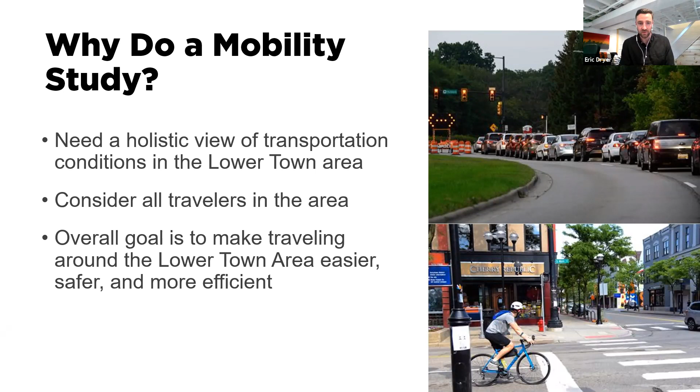So what we're looking at specifically are opportunities to make traveling easier within Lower Town. There's a couple of major traffic generators that we found: the U of M hospital, downtown Ann Arbor, the A2 STEAM School, and U of M North Campus, which are either within or very close to the study area. People are kind of going through this neighborhood or coming from this neighborhood to these traffic generators, contributing to the movements through the neighborhood.

Specifically, we're going to be looking at vehicle traffic congestion, how folks are able to bike and walk around the neighborhood, what those connections look like, what the safety portions of that look like, and how you're able to get around using public transit—where there are deficiencies in service, amenities, stops, or just general routing.

Safety issues that may be a result of outdated engineering standards or roadways that just haven't been updated in a long time, and intersection designs which can help improve cars moving through, and vehicles or bikes and pedestrians for that matter.

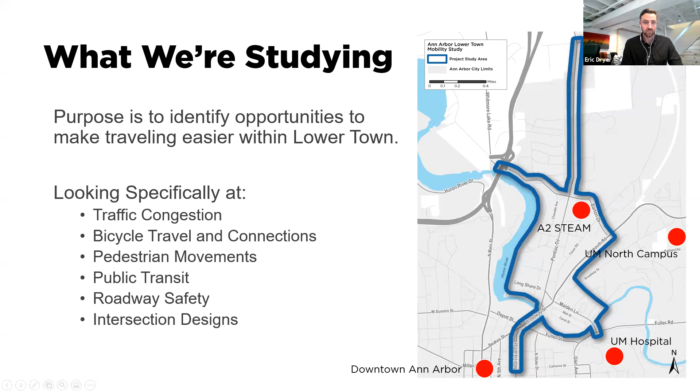The study process, we're maybe 18 months into this two-year process, about 75% complete. We've gone through the conditions analysis, project vision and goals, and we're now at the part of solution development. We're looking at what those potential solutions might be to some of the issues in the neighborhood and in the Lower Town area, and we're going to start to refine and evaluate those down to what the priority improvements might be. The next and final step is the final recommendations, which will be part of the final report and document.

The overall outcomes of the study, we're looking to identify ways to improve mobility for all users. We've hit on this a little bit already, but drivers, cyclists, pedestrians, transit riders, new mobility, bike share, scooter share, whatever it may be. Everything is considered in this study.

At a higher level, we're looking at how these opportunities can help change travel habits. Right now, people are used to just getting in their car and driving to where they need to go because that's the only way to do it. That's what they're used to. How can we, through some infrastructure design and other ideas, help change the way people get around Lower Town and around Ann Arbor? Maybe it starts out at one or two times a week, or one or two trips a week, but every trip that we take that's not in a vehicle helps reduce demand on the system.

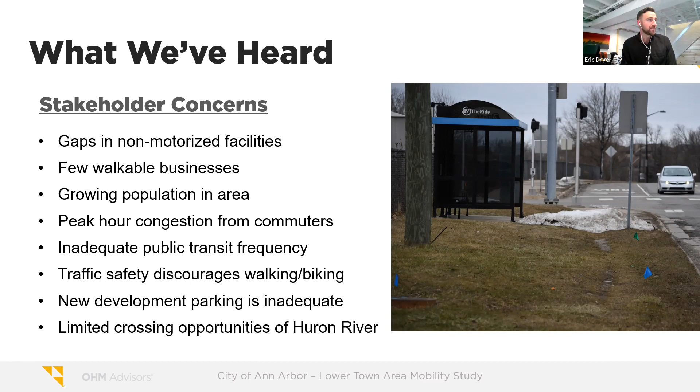We had a series of office hours a few months ago, one every week for a month I believe, and each one was on a different topic. We had some specific discussions about non-motorized traffic, about vehicle traffic, and other topics, and some specific areas in the study area were identified that needed safety improvements.

A lot of residents don't feel comfortable walking and biking in the area. They want to, but they just don't feel safe doing it. We mentioned transit - transit typically isn't fast enough or frequent enough for people to use on a daily basis. And there's a lot of heavy traffic that comes in off of M14.

The bike infrastructure is disconnected. A lot of the pedestrian infrastructure is disconnected as well, so people are riding or walking in the street.

There were some safety concerns around the A2 STEAM school that were causing some headaches, specifically at rush hour in the morning when kids are being dropped off. And we mentioned the new developments, and that's also adding to some of the traffic. There's fears that more development is going to add even more to the traffic.

There are some large safety conflicts between bikes and pedestrians on certain parts of the boardwalk on Barton Drive and around the study area. I believe with that, oh wait, no, there's one more slide for me.

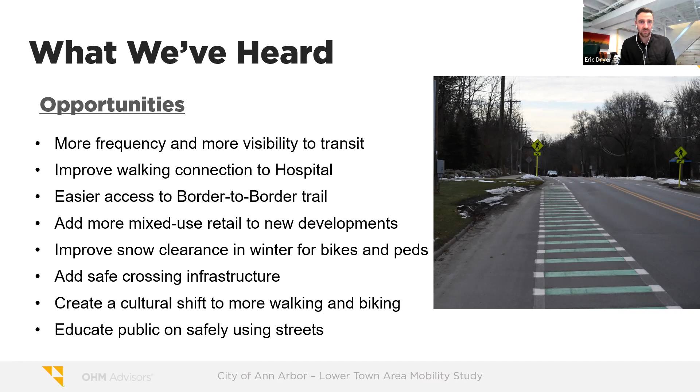I'm going to touch on all the different modes that we've been looking at. But before I get into those, I thought I could quickly touch on a few of the questions that were up there. There was one: is there documentation that new development parking is inadequate?

The last three slides that Eric just went through were what we got out of the stakeholder engagement. We had multiple meetings with stakeholders around the community, and those slides were just the findings that came out of that, along with the office hours. The office hours that Eric talked about were Zoom meetings where the public was invited to come in, and it was basically documenting what we heard from them.

We have not prepared any type of analysis that says development parking is inadequate. What I do remember hearing is that I think it was maybe the businesses in the area were lacking parking. Was that the gist of it, Eric?

I don't want to dwell on that, but I think it was a combination of the new large development and some of the businesses anecdotally not having enough parking, and people parking up on like Broadway and some of the other neighborhood streets, then walking down and just leaving their cars there for days at a time, essentially. Again, this is anecdotal — it's only what we heard from some neighborhood residents, but it was kind of related, I guess, to the new apartments.

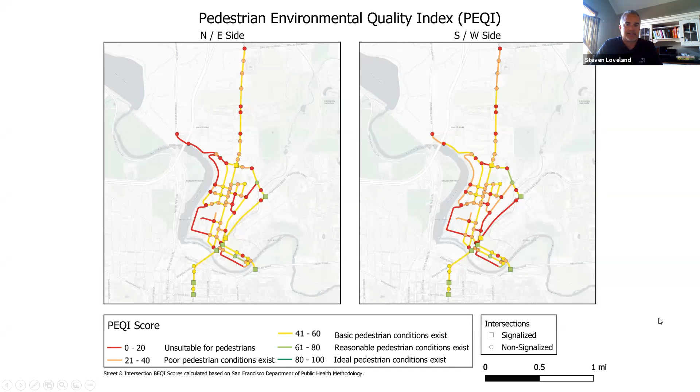As part of that inventory of the pedestrian infrastructure, we went over this in past presentations, so I don't want to dwell on it, but this is basically showing that we looked at all the intersections and all the segments. If it's yellow, it's saying basic pedestrian conditions exist. If it's red, it's saying it's unsuitable for pedestrians. An unsuitable area might have no sidewalk, or no crossings for all the legs of an intersection. Suitable would be there's sidewalks, crossings, or street lights. That's just some of the things it looked at.

So the major pedestrian findings out of all these different things we've done: there was a recommendation that came from the public about putting in rectangular rapid flashing beacons, near the school along Pontiac Trail. High emphasis crossings came out of the study of the unsignalized intersections, giving us a number of locations we could improve or enhance the crossings.

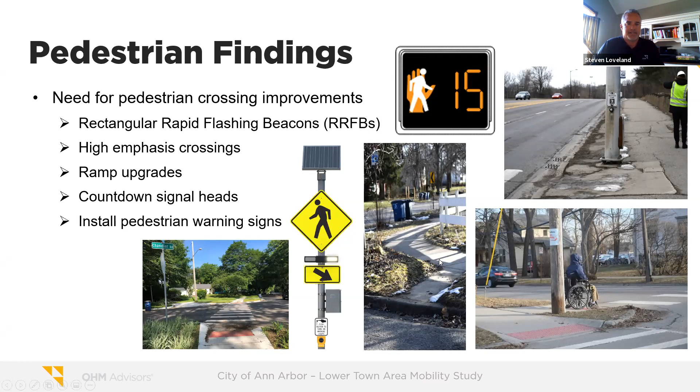There are some outdated pedestrian crossing signals that just have the hand or the walking person, but we're recommending upgrading all of those to countdown signal heads. And then there were a number of locations under consideration for additional pedestrian warning signs.

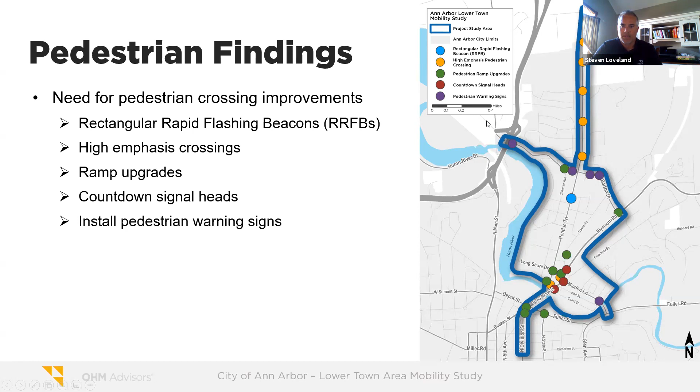Additional pedestrian findings, things that could improve the pedestrian experience: street trees and increased green belt—this came from the public engagement process, I believe the office hours. From the road safety audit, we identified gaps in the system for sidewalks, or where fence was broken or missing.

Lighting in general, the whole Lower Town, or the major routes throughout the area, are very well lit. There was only one stretch that didn't have lighting, and I'll show that in a minute. And then school improvements—we spent a day of the road safety audit just watching the school and trying to come up with recommendations on how to more safely get students to the school, separating vehicular traffic from where the pedestrians are coming.

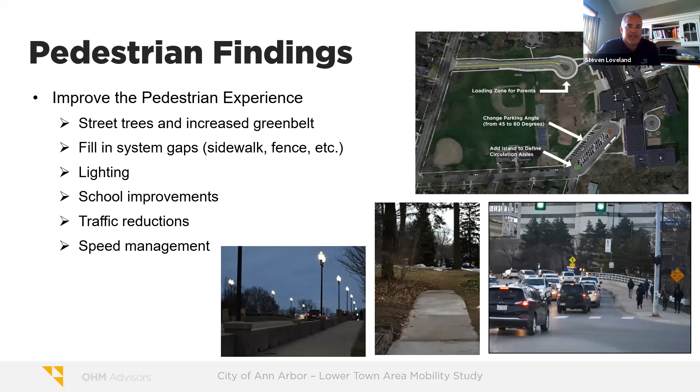And then ideas for reducing traffic and managing speeds—I'll get into those later in the presentation.

That intersection is lit up, but one thing we noticed during the road safety audit was that the lighting out there doesn't shine down on the pedestrian crossings. It's a little bit away from the crossings, and it could be improved for pedestrian safety if it was more focused on those crossings.

I'll take a break here, see what other questions we have.

There's a question in the chat from Cedria Clark about RRFBs.

Are they useful by the school when peak traffic and pedestrian hours are during daytime? So would they be used during the day and throughout the day, or only at the peak hour?

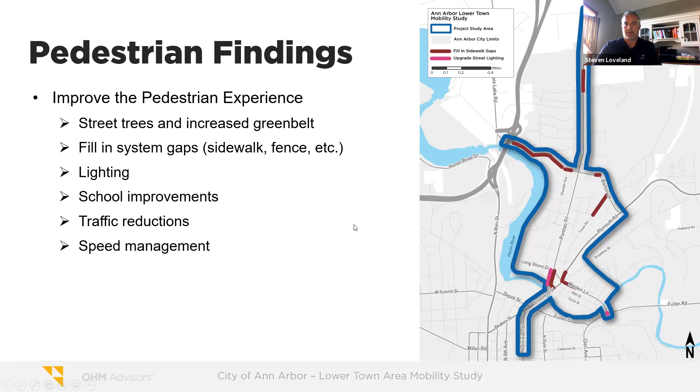That's in this area. Okay. Good questions, everybody.

Okay, the bicycle analysis approach. Again, we did the same type of thing we did with pedestrians - a bicycle environmental quality index. We also considered bicyclists during the road safety audit. And we heard a lot from the public and stakeholders about biking in Ann Arbor, biking in Lower Town, where biking is lacking.

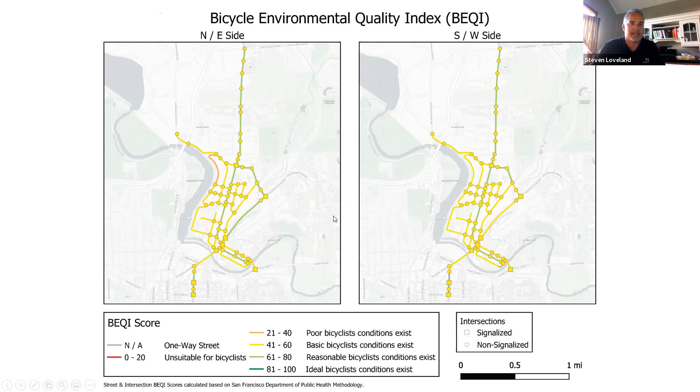So the key findings coming out of the bicycle analysis: what we heard a lot is wayfinding signage is just not out there to identify where the bike routes are, where they end, where they start. Another major issue brought up is where bike lanes end and there's nowhere for cyclists to go. One of the biggest spots for that is coming down Division heading north towards the Broadway Bridge, where the on-street bike lane just ends abruptly.

Another thing was on-street bike lanes. There's a number of areas around Lower Town where an addition of on-street bike lanes were recommended or brought up by the public as needed.

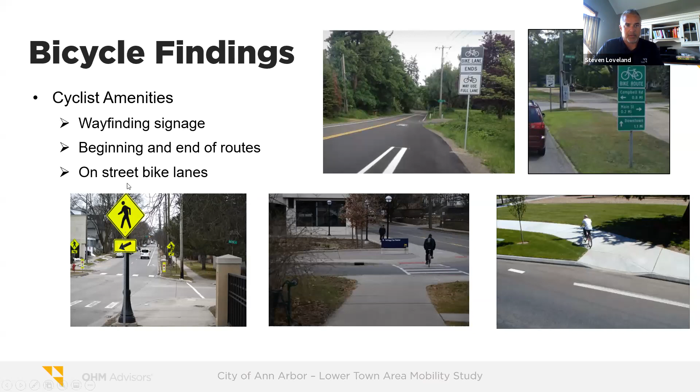There was a recommendation about a bike boulevard, talked about having that along Chandler. Lanes adjacent to parking - it was recommended to widen the bike lanes along parking areas, so that if vehicles are opening or closing doors, bicyclists would have a little extra room to safely travel those routes.

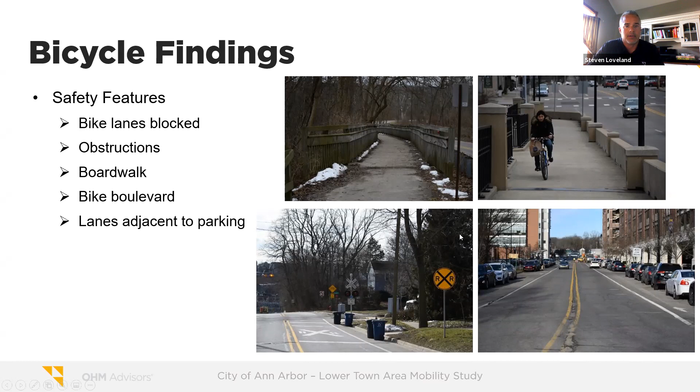So, questions on bikes specifically? I don't see any questions in the chat. Anybody want to raise their hand? We can always come back to this if you think of things at the next break.

Oh, there's a question. Is there the possibility of getting the Barton Street parking removed to complete the bike lane? Luke, do you know the part that's under construction now, Barton? Yes, there's still a little bit of work being done on Pontiac Trail north of Barton. I know there were sharrows added on Barton in that newly constructed section, but I'm not sure - parking is still there for now.

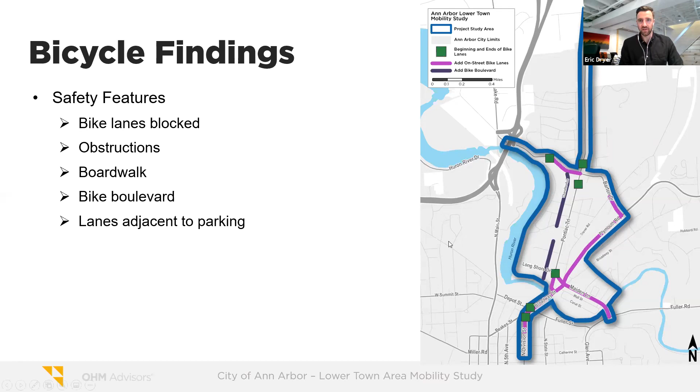Any last questions before we move forward? Again, if you think of things, put them in the chat and we'll get to them at the next break.

I'm going to move on to transit. For transit, we did some field reviews during the road safety audit, we heard from public and stakeholder engagement, and we also held a brainstorming session with both the public and key stakeholders to get ideas.

On this slide you can see, in the bottom right pictures, a pull-off along Pontiac Trail for one of the transit stops. In the top picture there's a bus stop, but there's also parking allowed right in front of it, so probably not the best setup for a bus stop to have parking right next to it.

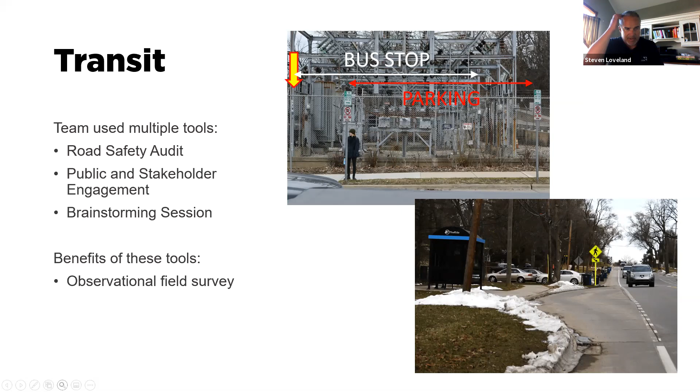So, transit findings on rider amenities: we heard there's a need for increased frequency and reliability of the buses. Our findings from the road safety audit were to upgrade the bus stops for ADA compliance. You can see in the two right pictures there's no pad for pedestrians to load. In the bottom right, this looks like it's used quite a bit, with a path leading up to where the bus loads. So we found a number of spots throughout lower town that needed improvement.

Additional park-and-ride opportunities: there is a park-and-ride lot at US-23 and Plymouth Road. We looked for other opportunities where additional park-and-ride lots could be implemented, and I'll show a slide on that further into this presentation.

Eliminate bus stop conflicts, as I mentioned on the previous slide. And then someone from the public engagement mentioned transit signal priority to help move transit through the lower town area.

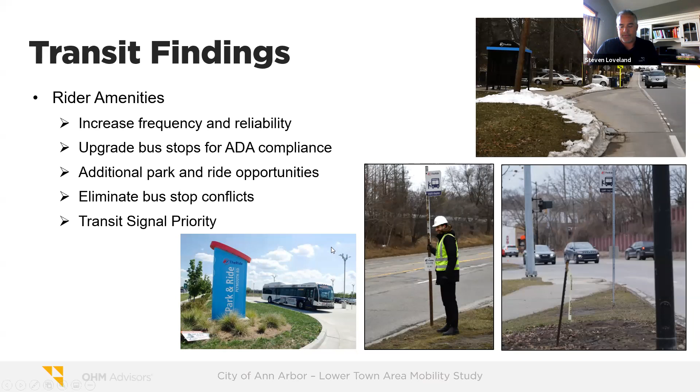This slide here basically just shows where we found bus stops that were missing landing pads or ways to the stop that were not ADA accessible.

And that was all we had for transit. If there's anything specific on transit, let us know.

I think there was a question about plans for more bus stop shelters. We haven't had any comments so far about more bus stop shelters. Luke, do you know if that's the bus agency that picks those, or does the city have a say in that? I haven't heard any specific needs or locations. Right, so far that has not been heard or proposed in this study. The city can, of course, make a recommendation, but I think it's up to AAATA to make the final decision.

And then, go ahead—oh sorry, there's a question clarifying, for each of these, what is based on data versus public engagement comments for each of the recommendations. Maybe we can explain a little bit what each of these actual recommendations are. They came out of both, correct?

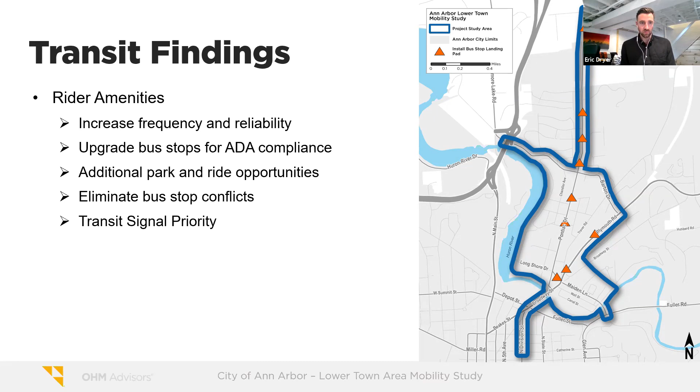Okay, I'm going to get on to motor vehicles. This is just a couple slides, and then it's going to get into more specific intersections and improvements. For motor vehicles, we looked at all the same stuff, but we also did traffic modeling of the existing conditions. For existing conditions, this was pre-pandemic traffic volumes - they're a little different now, but I think using the pre-pandemic volumes was conservative.

We also did a crash analysis of the entire Lower Town area. Key findings for motor vehicles - most of these came out of our road safety audit that we performed over a week's time.

Pavement markings - there were some areas where the markings were faded and needed upgrading and refreshing. Signing throughout Lower Town - we specifically pointed out some of these through the road safety audit, and the city is looking into them. Some of the signs, like the one in the picture upper left, have lost all reflectivity. So by improving signs and putting up fresh, new reflective signs, that will definitely help drivers at nighttime.

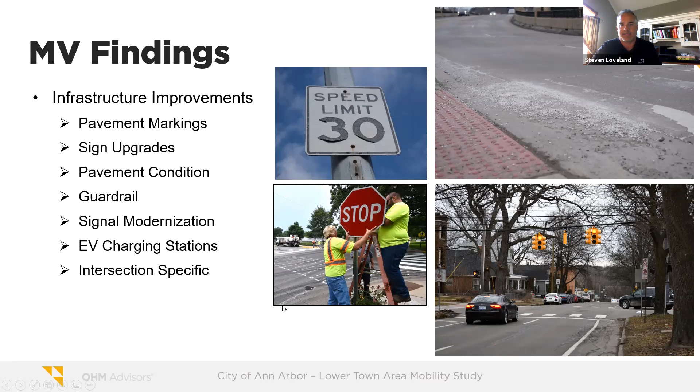Some driver technologies being recommended: changeable message signs coming into and through Lower Town, identifying maybe where there's traffic backups or if there's a train blocking - just what's going on in the area to help all modes of travel get through. Speed management concepts, which I'll touch on closer to the end of the presentation, and warning sign systems about traveling above speeds. Then transportation system management and transportation demand management, which I'll also touch on.

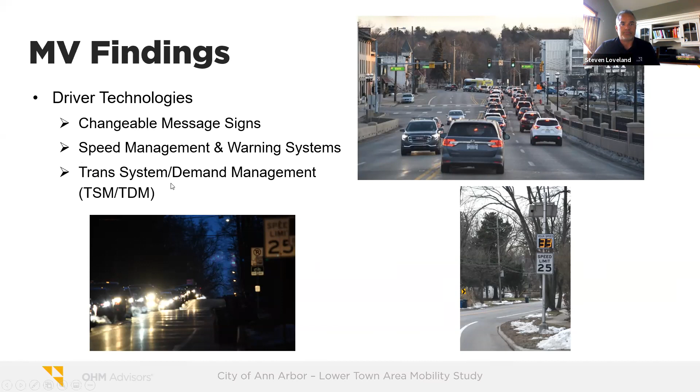I'm guessing there's not going to be a whole lot of questions right now, but once I get into more specific recommendations, I'll move on to those.

So there were high congestion intersections. We had 3 that were just based on observations from when we were out there. And then we also did our traffic modeling, and with the traffic modeling, we found some of the intersections had either failing or had failing movements at them.

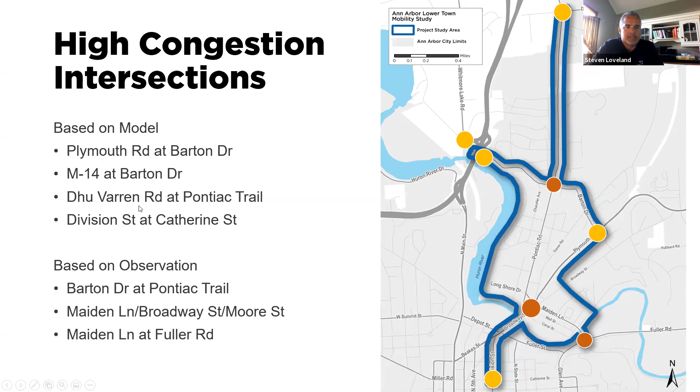The yellow dots are where we found failing within our traffic models. The observation locations were Barton at Pontiac Trail, Maiden Lane, Broadway, Moore, Maiden Lane at Fuller. But then in the modeling, Dhu Varren at Pontiac Trail, the M-14 intersections, Plymouth at Barton, and then there was Division at Catherine Street.

So Barton at Plymouth, what we found here is that in the AM peak hour or peak hours, there's a big delay on Barton trying to get out onto Plymouth. And it was showing over 70 seconds of delay.

So what we looked at here is potentially changing the lane configuration. Instead of just being a left and a right out onto Plymouth, it could be a dual left with a shared right. And in doing that, we reduced the delay by over 20 seconds. This isn't a huge change—you won't have to build additional lanes. It's more of a pavement marking, signs, and looking at the signal timing at that location.

We looked at a number of things at the Barton at Pontiac Trail intersection. What we've heard and what we've seen, there are operational deficiencies, there's on-street parking at the intersection, and we've had numerous people ask for the parking to be removed. In the AM peak, there are big delays on the approach to the intersection for eastbound traffic. In the lower right corner, you can see what a morning peak hour looks like as you approach that intersection. On average, it was 35 seconds of delay, which it can be much more than that.

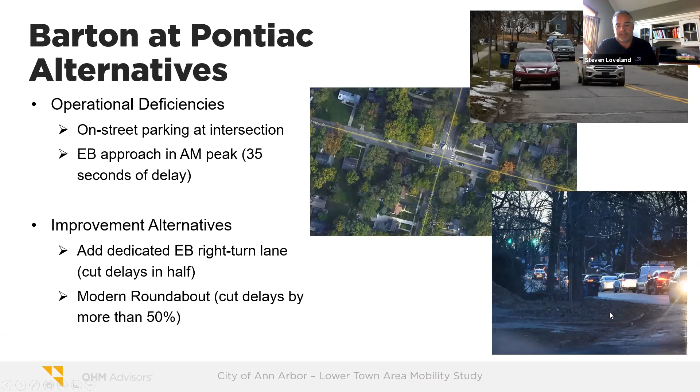Currently out there today, there is this temporary bump out condition. It eliminates the parking near the intersection, and it channelizes eastbound down to a single lane. So we're looking at restricting this eastbound parking, and we're also looking at the option of maybe making this temporary bump out something we could make permanent.

All right, do we want to see what questions have popped up on this so far? Yeah, there's a couple. Oops, sorry, that was my fault. All right, so the comments—well, go back to the Plymouth at Barton, I think people are talking about that first. Oh, there's a question before about changeable message signs and other technology and how that would change traffic levels.

Changeable message signs, that was also brought up—that was an idea that came through our public engagement process. Steve Deering, did you know more about that? I think you've talked about that quite a bit.

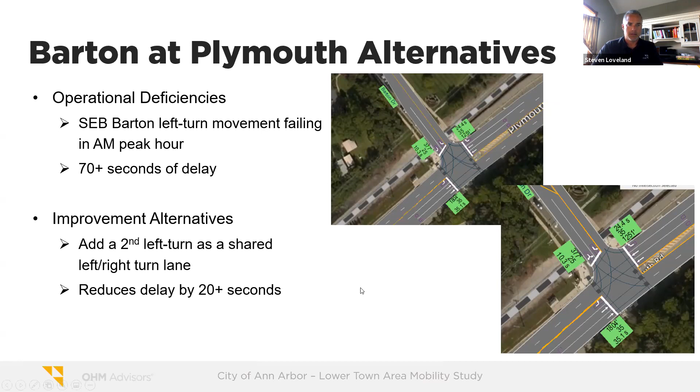Pontiac, Barton. Okay, so we've gone through this. I know people are talking about getting rid of the parking altogether and having a protected bike lane.

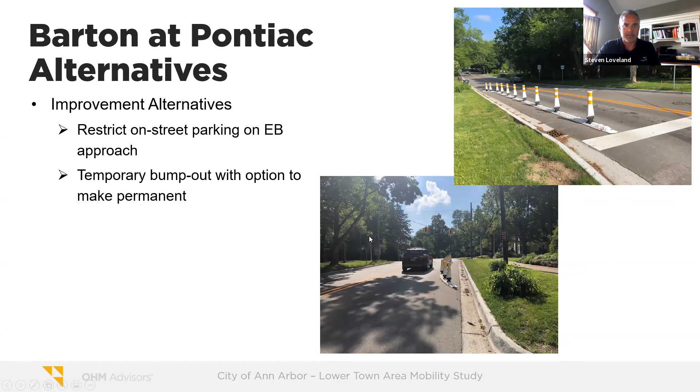That's noted. I'm going to move on to the next intersection, and we can talk more after we get through this if there's more discussion on these other intersections.

All right, Steve, I'm going to let you handle this. You're on mute, though. Hi, this is Eric Dryer, and I'm going to take over just so Mr. Loveland has a little bit of a break.

So this is probably the most complex and confusing intersection in the study area. Broadway, Division, Beakes, but it's also Carey and Summit and High Street and Detroit. So you have 7 streets that create this very complex junction.

And it's come to our attention through a variety of reasons. The crash study showed it was the highest crash location in the study area, 73 crashes over a 5-year period, 10 of those involved injuries.

It was also something that we noted very prominently when we did our road safety audit. It was also something that came up repeatedly during the stakeholder and other types of public engagement that we conducted. So, and city staff, they made a particular point of bringing this to our attention. So there's a lot happening here.

And one of the ways that we have to try to analyze something as complex as this is we look at conflict points. That's where a vehicle will cross or intersect with another vehicle path, that's where a vehicle will intersect or cross a pedestrian path, and that's how bicycle facilities, if they're on street, how that all interacts. And so there's an abnormally large number of conflict points in this area.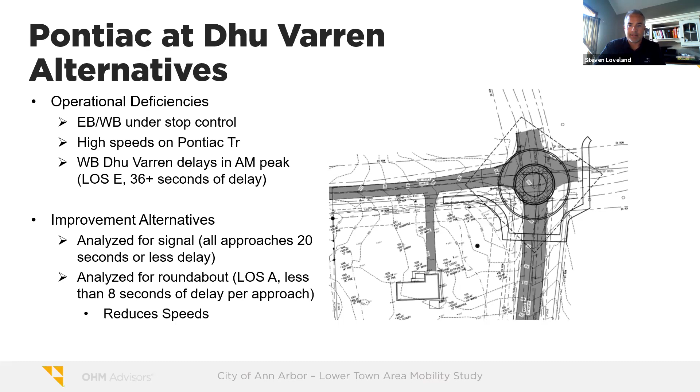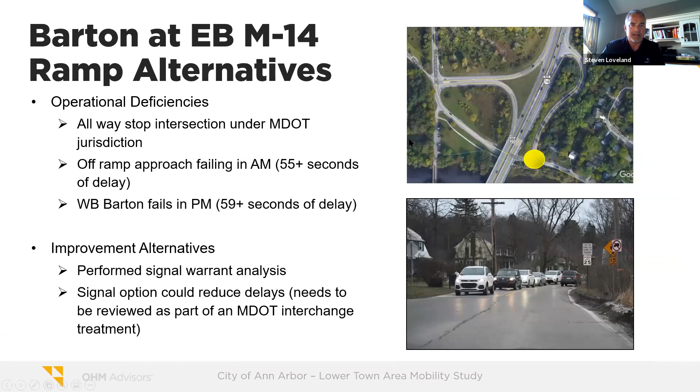Now we're at Moore, Pontiac, and Longshore, which is another very confusing junction of roads. This is another one that we picked up as having a relatively minor crash history, but it was certainly something that we noted with our road safety audit. Again, it was also pointed out to us by city staff, some of the stakeholders, and I think it came up also with the different office hour sessions that we held.

So to the north is Pontiac, and it's a two-way road, but at this junction, there's basically a split. Moore coming off of Broadway is a one-way in, and then Pontiac south of here, heading down towards Swift, is also a one-way. So this is where the two-way Pontiac becomes, with Moore, functioning like a one-way pair.

The geometry is confusing because traffic on Moore coming up that wants to go to northbound Pontiac does not have to stop. And traffic coming south on Pontiac does not have to stop, but all the other movements do.

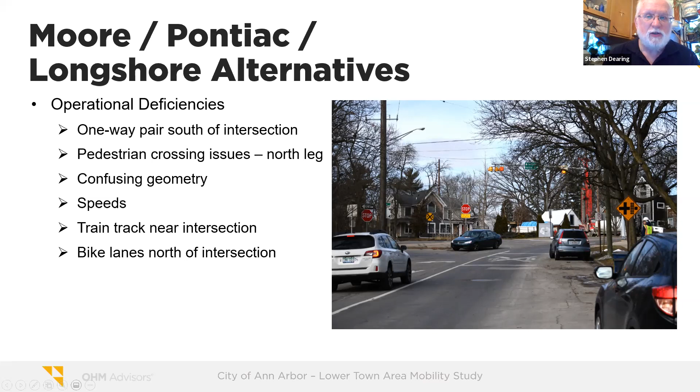But with this particular intersection, what we were focusing on most was the fact that there's a fair amount of confusion about this intersection. If you look at the picture, you'll see a vehicle that looks like it's trying to make a left turn from Pontiac onto Moore, except Moore is a one-way road. So just the nature of the geometry makes it confusing for everybody.

So again, we looked at alternatives, and again, the mantra of conflict points: if you can reduce conflict points, you're going to reduce the potential for crashes. And we had a whole range of alternatives.

In the top right, basically doing a better job with pavement markings and signs, to try to eliminate anybody making the southbound left turn to go wrong way down Moore, which is one-way. Making it a lot more clear that there is a pedestrian crossing on that north leg of Pontiac, so that drivers are more respectful in terms of taking that corner at a slower speed. So that doesn't do anything to reduce the number of conflict points, but it would still clean up the intersection and make it a little bit more obvious to drivers what's actually happening there.

Then if you go to the bottom right, yes, we know that there's an island there to help northbound Moore kind of make that sharp, almost a U-turn to go south on Pontiac. But that island could actually be a lot larger and more prominent to again help cut off that whole idea of a wrong-way southbound left turn onto Moore. It would also, depending on how it's designed, potentially let us make the Moore to northbound Pontiac turn a little bit sharper, reducing the radius to get cars to slow down a little bit more.

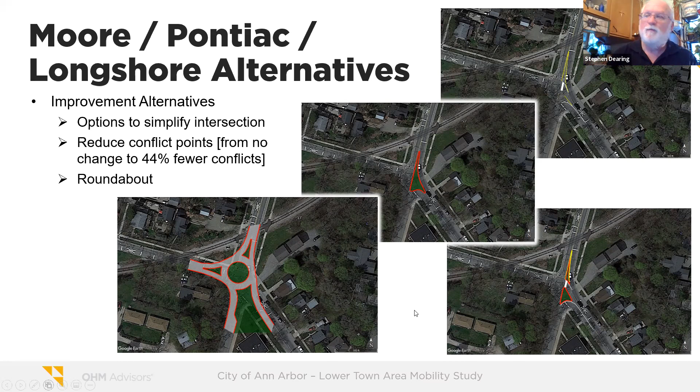I'm just going to go forward with this last one, but when I finish Broadway at Maiden Lane and Moore, we can go back and talk about either of them if you want.

This is another one where it came out through our road safety audit. There was some crash experience here, but it was not an unusual number. We also had various inputs from our outreach program to hear what people are thinking and talking about.

Our modeling noted that there's some, not a lot, but some congestion on Broadway at this intersection, with about 25 seconds of average delay in the morning and about 32 seconds in the evening commuter times, which is not bad at all.

But particular movements, like the southbound left turn from Broadway onto Maiden Lane, are particularly heavy in the morning with a lot of delay, just short of a minute.

Then in the evening, it would be both the northbound Broadway left onto Moore, as well as the northwest bound Maiden Lane left onto Broadway. Both of those represent high levels of delay, 68 and 56 seconds respectively for Broadway to Moore and Maiden Lane to Broadway.

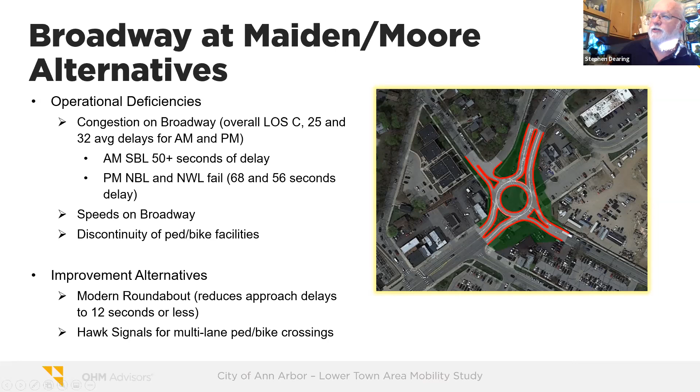The last couple slides, this one's transportation demand and system management. Operational deficiencies: there's congestion during the peak periods, the AM and PM peak, and what does all this traffic bring but vehicle emissions.

Looking at the M14 Barton Interchange, the park up on Dhu Varren as a possible opportunity, and then going even further out up to North Territorial.

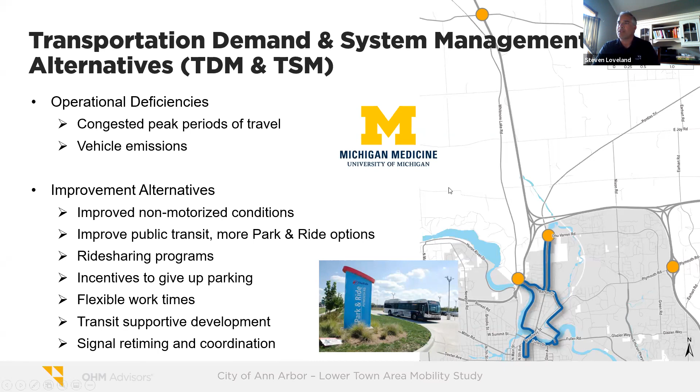The last topic is speed management alternatives. We've heard from many people, and seen it ourselves, there are noted high speeds on Broadway, Pontiac Trail, Division, Plymouth, and we've even heard it for Barton today. Speeds are important and critical because we're looking to improve pedestrian and bicyclist safety.

Some of the alternatives we're looking at for speed management: we've talked a lot about roundabouts, which really help slow down traffic. We've talked about potentially turning Pontiac Trail into a roundabout corridor, as you've seen with different intersections. Median islands, limiting the amount of pavement cars have to drive on, tends to slow down speeds. Neck downs or bump outs at intersections, like the temporary condition at Barton and Pontiac Trail, also help slow traffic.

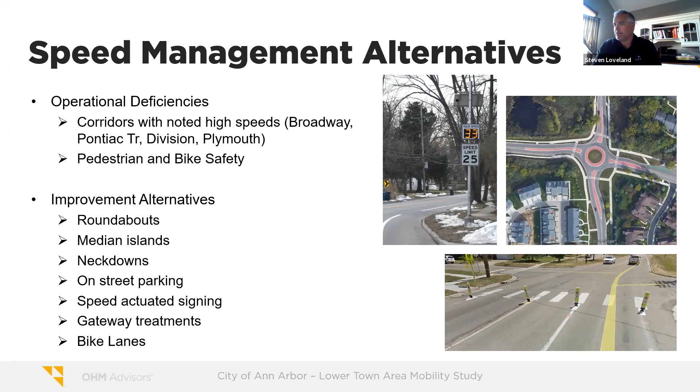I've got one last slide, just next steps. We will pull together a summary of the questions and comments from today's meeting and post that on the project website. We'll also have a video of this public meeting up there. Going forward, coming out of this meeting, we will consider what we've talked about tonight, further consolidate and refine these alternatives, and continue our analysis and evaluation, since we're just getting the future traffic volumes together to look further out to see if these options are right.

We are also in the process of beginning the final report. Between now and the next public meeting, we're looking to get office hours together again, basically an hour meeting where we can get together and talk about different topics of the project. If there are any specific topics you'd want to dive deeper into, we're open to that as well. Finally, the final public meeting would present our ending overall findings and recommendations coming out of all this.